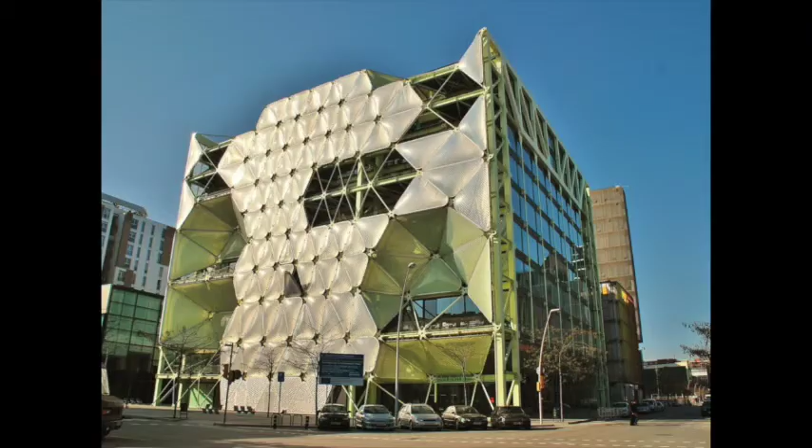And then more recently, and I think more profoundly as we move forward, are buildings that actually function more like organisms - biomimesis. They operate in an organic method to interface with the ecologies they're in. This is a building by Cloud9 in Barcelona, a fairly recent building. On its northern facade, as you can see on the right, one of the north-facing facades, it's open and clear with maximum glass.

On the other two southerly sides, it's largely protected by ETFE, which is a polymeric plastic pillow. You've seen this in the swimming cube, the Water Cube in Beijing in 2008.

These pillows are silk screened and filled with a gas, mostly nitrogen, which expands with heat sensors and fills it up, causing it to vaporize. It allows light to pass through but cuts glare, diffusing the glass because it has a kind of translucency.

Behind it, there are other areas where larger spaces are not filled with this kind of tile, and there's almost a reptilian, organic quality to how this matters. So you see three buildings over the course of 20-plus years, almost 30 years actually, that manifest themselves differently in interfacing with ecology.

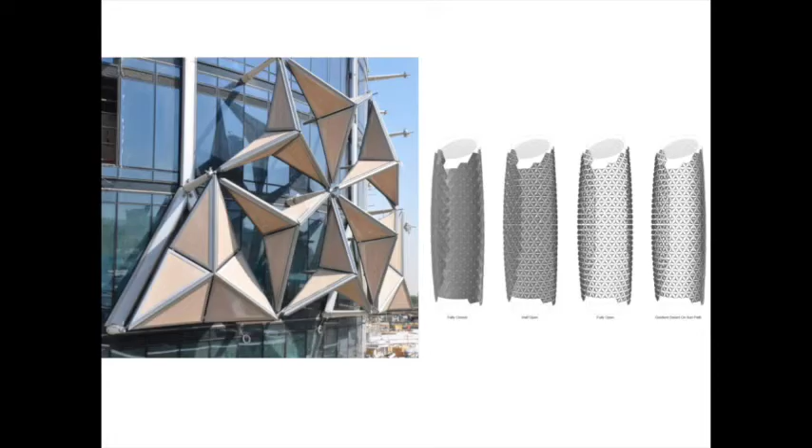Very recently, the Abu Dhabi Investment Council has done a building which you've probably seen—it's been much featured—but these are basically 2,000 triangular flower petals that are exoskeletal to the window.

The architects did not want to either coat the glass, that's to say tint it, or put a reflective coating on it. They wanted to maximize natural light when they could, so they made the choice of wrapping a shroud, optimizing the petals into 15 different petals, which then open and close in various degrees of aperture depending on the rotation of the sun.

So the building exterior moves, the interior building stays fixed, and when the sun isn't there, you get full view, literally full view. When the sun is there at a high point of exposure, it's quite opaque and closed. So again, it's a building that's interacting with the climate.

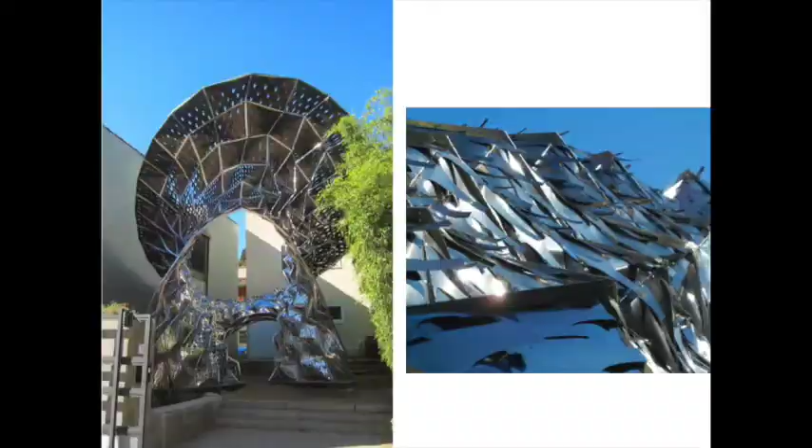In Los Angeles, there's a young group of architects—Doris Sung is one of them—who's experimenting with thermobimetals. These are metals which have existed in product design, but not really, to my knowledge, in architecture.

This is a very large mock-up, architectural in scale, but it still hasn't been applied. It's taking two metals with different thermal coefficients of expansion and putting them together so that when the sun hits it, the light is converted to heat. They bend or move at different levels, causing them to curl in ways that allow openings to occur to ventilate off of the interior surface, or actually to shade if they go into a closed position.

This is a very experimental thing. I think we'll know more about it as it's understood further, but you can see the kind of formal possibilities for some of this. This is a mock-up that Doris has made—it's about two years old.

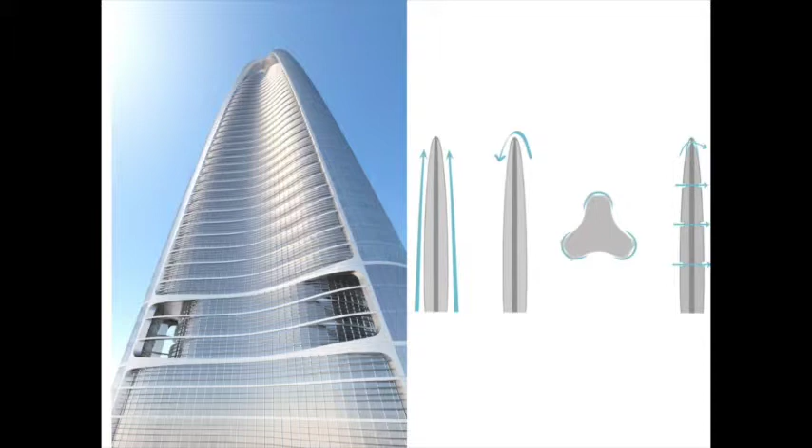There are a series of case studies in the book about aerodynamics and wind power. This is a building in Wuhan, a tall building by Adrian Smith and Gordon Gill, and they've done a number, as have other architects, that look at the aerodynamics.

The vectors on the right-hand side show you the acceleration zones of how frequently on a tall building the vortices will be vertical at the top. Anytime there's a bend, a corner, or a turn, a lot of things happen with wind, but by softening the corners, it actually accelerates the wind speed.

By creating apertures, it can accelerate—we all know the Venturi effect—accelerating and heightening the concentration of energy, then capturing it through turbines. There's a discussion in the book about these, but they obviously have implications on the kind of formal generation of the building type.

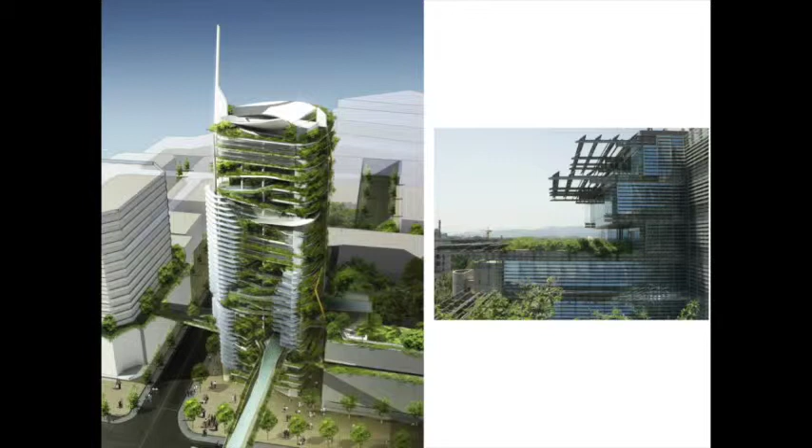Then, at the end of this chapter, we look a bit at biomorphic architecture. This happens to be Ken Yeang on the left, someone who has spent some 30-plus years mining this idea of tall buildings that actually would allow the groundscape to grow up through them. They're highly cavernous.

He's principally a Malaysian architect, and from his original house for himself 30 years ago, through a series of both proposal projects and a few actual projects, he's continued to mine this area of deep shade, cross-ventilation, indoor-outdoor spaces, and bringing the bioforms up through the building to oxygenate the shaft of the building.

On the right is Mario Cucinella at Tsinghua University in Beijing for a demonstration building there. We're looking at the southerly facade, seeing the horizontal shading racks, racks for photovoltaics, the idea of the sun, the oxygenation, and the plant material on that facade—how permeable that is. Similar buildings doing similar things in different ways.

Next. Performative skins. The prior chapter was somewhat about skins, but this goes into a little bit more detail about skins.

Probably most of us know this, but in my view, glass is really the preeminent material, the persistent material. We know the history of 19th century drawn glass from garden structures and pavilions and arcades and all of that.

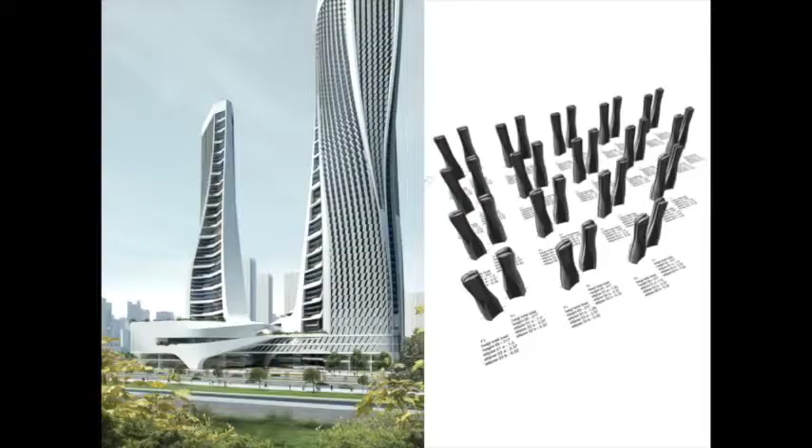This is a project by UNStudio, Hangzhou. It was Raffles City, the 7th project. The principles there, we're trying to do many things. It's a podium building, a shopping entertainment podium with 2 towers.

The towers are mixed use, with office in the lower portion, hotel and residence above, and multiple cores in the center. They bulge at the bottom and get smaller, but there's a desire to make them tortile. As soon as they become tortile, they activate the surface because their relationship to the sun changes in a very fluid way. You see some of the prototyping and mapping on the right.

The next image shows us some of the issues. This is an exaggerated view here on the left, but it shows that it's bigger, and as cores drop off it gets smaller. You see the plan sections up to the top.

Most importantly, in the east and west hemispheres, the shading is vertical. As it rotates into the southern hemisphere, it turns horizontal because the sun is high and running directly against the glass. So the efficiency, the performativity of the shading system, actually articulates a fluid rotation of these baffles, and you're seeing a little piece of it in the upper right. It's a way of taking the form, mapping the sun's impact, and then responding through a series of baffles.

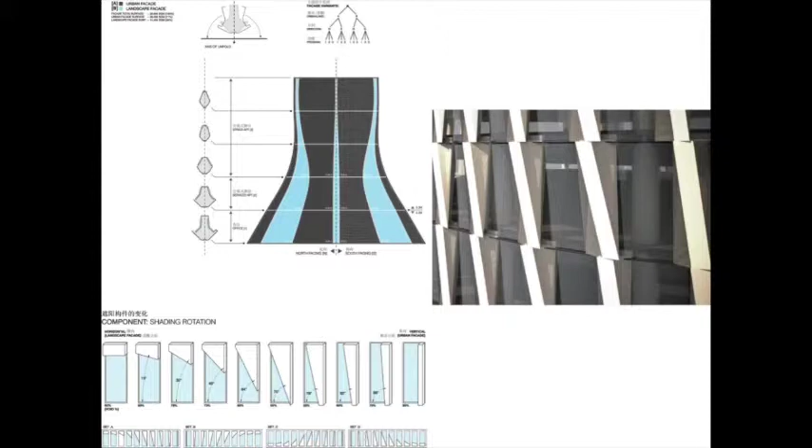Next, much talked about building, the Phare Tower in La Défense, Paris, by Morphosis and Thom Mayne. I think this project is very interesting for what it shows about idealization versus optimization. You all may remember when this came out in 2007, that long ago. It hasn't been built, but it's gone through a process of further design and constructability.

Where we are today, as I understand it from Thom, is closer to the end, which is to say all the skin members are flat now. They're all rectangular. They basically take their fluid form by changing the distance between the panels, so everything is absorbed in the panel joint rather than in the panel itself.

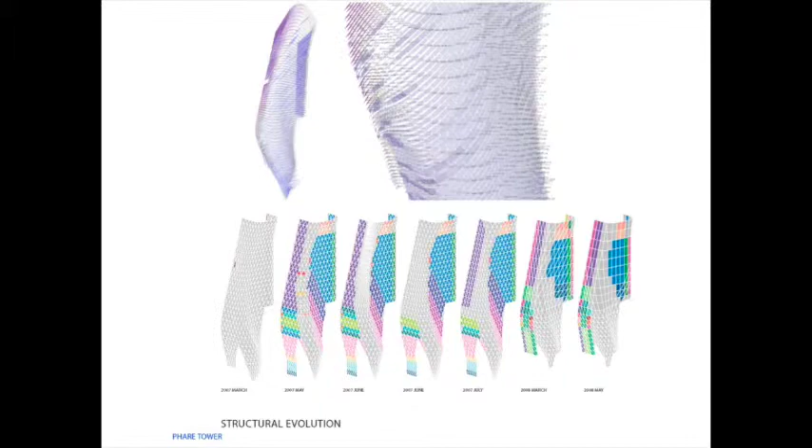Next, a building you all know, by Frank Gehry, 8 Spruce. In Frank's case, Ryan, we'll go ahead—you probably know his office. We went over to his office and I asked him if he would show us his model.

This is some of his models for this project. Frank always works three-dimensionally, more or less by hand. He builds things physically, and then historically he's mapped it. On this particular project, they worked through Rhino datum surfaces, then went into CATIA, and then into DP, digital projects, which they use now.

You can see some of the pieces were tortile—some of his earliest ideas were very tortile and shaped. At some point the development of the core and the units were developed. This is, as you know, a residential building, so there's metrics involved in that. And then you see the big models were really about surfaces onto cubic forms.

There's a whole range of things in here, but you've seen it, you know what it is now. It's really a T in plan, which fits the site, fits the adjoining streets, and then it's modeled in very specific elevations.

Like I mentioned with Tom and Morphosis's Phare Tower, again there's a rationalization process that tries to identify flat panels, panels with some complexity, and panels with more complexity. It grades them. There are floor-by-floor curtain wall units rather than long stick systems, so it can be put up in a unitized way. Then there's a metal system, an aluminum system, that goes over and expresses the curves on those elevations that have curves.

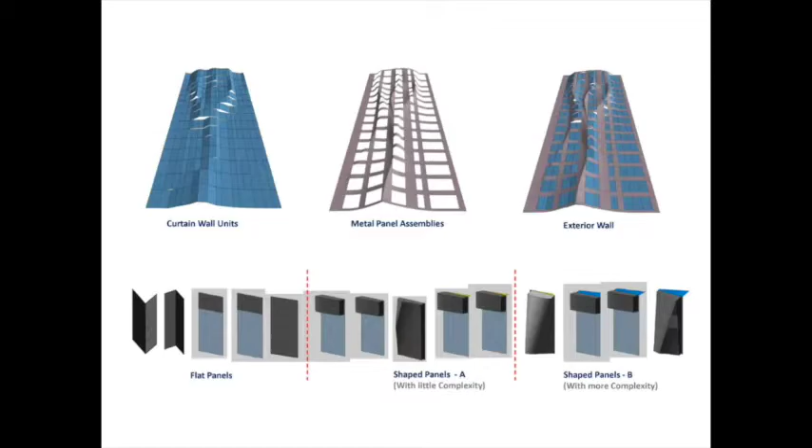Then there's an exterior wall, a series of sheets, stainless steel, that gets riveted to what's behind it. But all the windows are flat and straight, also flat in various orientations, yet very muscular, very rich. In Frank's case, I think it's a very accurate evolution of his physical modeling conception.

Next, next to last chapter: Performative Neighborhoods. This is a chapter I spoke about in the first book, actually, because it interests me a lot.

It's about mixed-use vertical buildings. There has been in the United States, maybe less so in New York, but in the West in general, a penchant for single-use buildings. The economics of that kind frequently prevail. But in Asia, it's not true, and in other parts of Europe it hasn't necessarily been true either. It's interesting going back to some of the first examples of mixed-use towers.

This is a famous example, Frank Lloyd Wright's Mile High Tower. It was part of the Broadacre City moment for him. He was 86 years old, and he said this would be a mile-high tower with 6 million square feet. I think the interesting thing is he said there'd be thousands of residences, office space, a hotel, concert halls and cultural venues. Yet when you look at the building, there's no expression of any of that—it's one sleek, unified single form, notwithstanding the narrative and program of what it is. I think this was the beginning of thinking in the West, in a very pure realm, about what it meant to be mixed use.

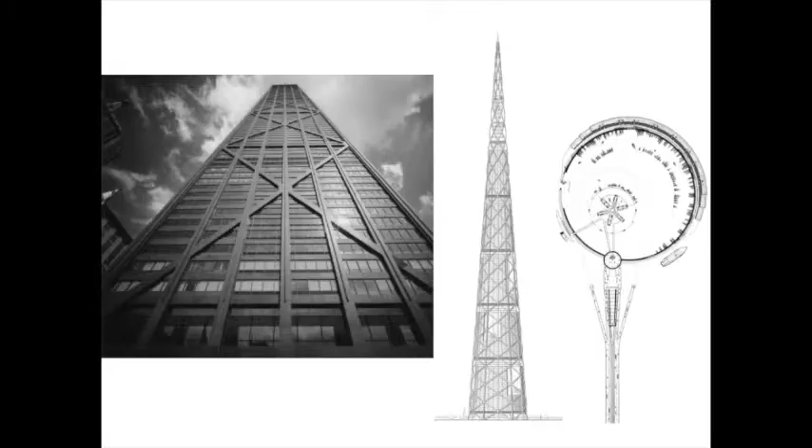The next one is the John Hancock Tower in Chicago, by Fazlur Khan and Bruce Graham at SOM's Chicago office. The building is 40 stories of office, then residences, then a restaurant, then an observation deck. It cants in slightly—it batters—because of the size of an office floor plate as conceived then versus the size of a floor plate for the residences. Other than that, that's the only giveaway, along with the floor-to-floor height, which slightly varies as you go up. But again, conceptually, the office was thinking of it as a single monolithic piece rather than expressing its differences. That seemed to be how we as architects, or our fathers or grandfathers, conceived of mixed-use buildings in the West.

On the right is Millennium Tower, Tokyo Bay, by Norman Foster. Again, it was a super tall building conceived as one piece, with a whole city in it, sitting out on the bay outside of Tokyo. What amuses me are the big cutouts you see, knowing the space was actually a donut with atriums inside. That obviously prefigured his Commerzbank, developed about 20 years ago, which you may know in Frankfurt, with triangular and octagonal openings and 5-story high atriums in the center. He was clearly in that zone when thinking about this. But still, it's one form rather than multiple forms—it doesn't really give the program expression.

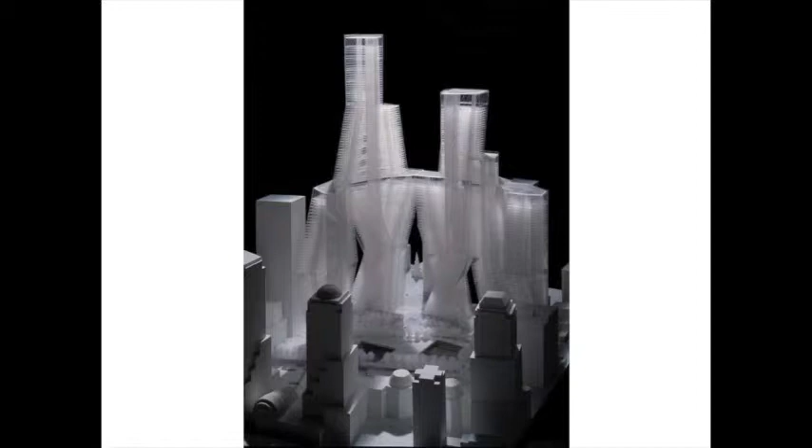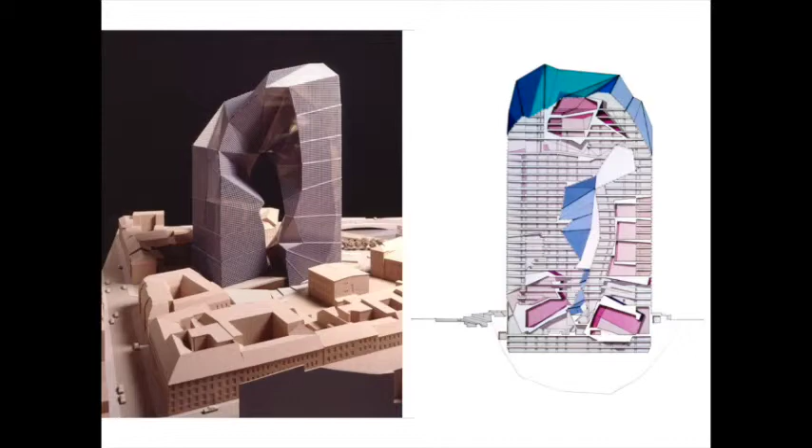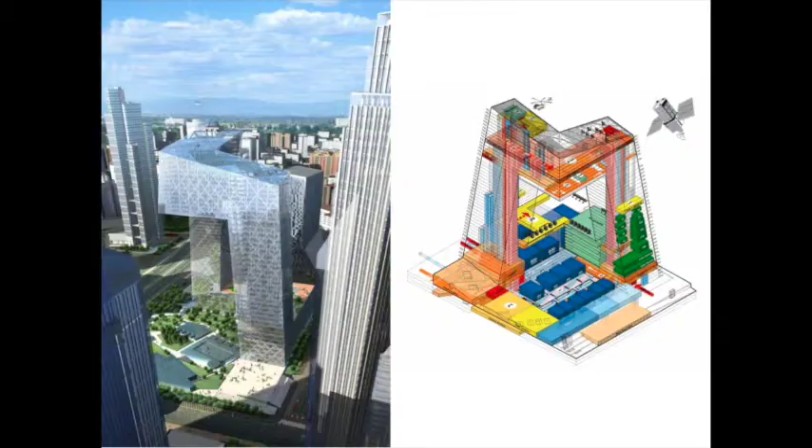One person I just want to point out who's always had an abiding interest in mixed-use form, and this isn't exactly a tall building. This is maybe a tall building on its side.

But all the early schemes, Steven Holl for Simmons Hall at MIT, which is a dormitory overlooking the Charles River, had all kinds of three-dimensional spaces and common student meeting spaces within it. It was pulled back, somewhat reduced, but the residue of that intellectual thought is still in the building, with large outdoor spaces, 3 cores that service vertically, horizontal connections that tie into the cores, and lounges and common spaces at various points through the building. So it was the beginning of an idea.

Steven has carried it further, into tall buildings. It's never gone away. Dramatically,

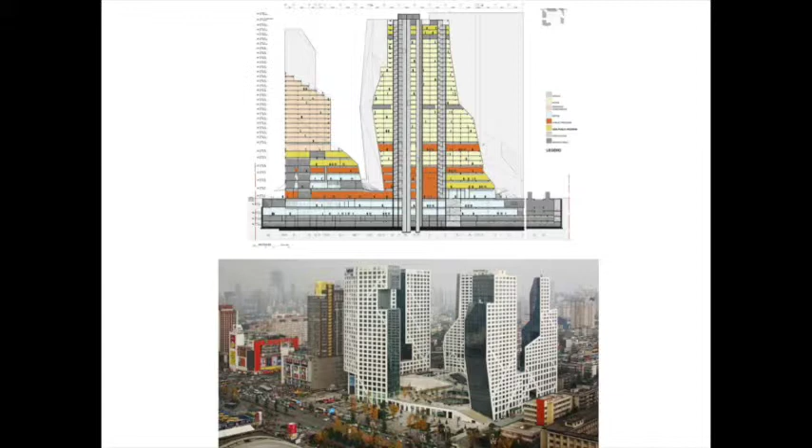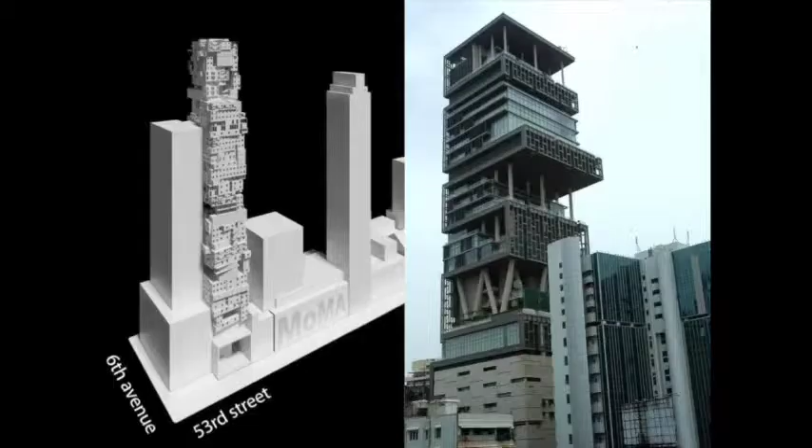And then, end the chapter on the idea of articulation and definition. Is it possible? It's kind of a conundrum. This was one of many projects done as commentary on MoMA's efforts to build a tower. And the idea, could you ever articulate functions? Is that possible? Is it desirable? Would it make it instantly obsolete? I think it raises as many questions as it answers.

On the right, the major telecom giant's tower in Mumbai. If you've been to Mumbai, you've seen this building, in the downtown core, at the bottom of the bay. As I understand it, it's still unoccupied, but it's a design of a tall building for a family of 6 people, and probably lots of service people as well. But the idea is the meaningfulness of articulating something, or the relevance of it over time.

Okay, the last chapter, and I'll end on this, is brief, because it has to be brief. Cities are complicated things with enormous histories, cultural histories, but just looking very topically at how buildings are made, it's tempting to see tall buildings as generic and non-city specific, because there's a group of professionals globally who make them. There is, to some degree, a global science and engineering knowledge base that we all use to work with.

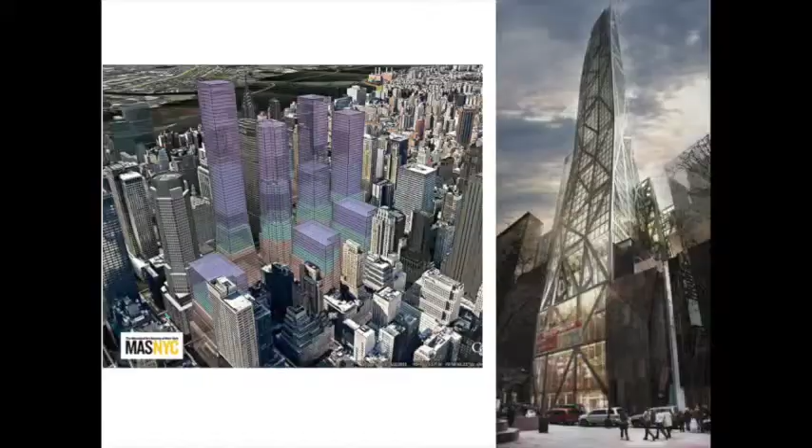I'm not here to tell New Yorkers about New York, but I follow it closely because it tends to prefigure what happens in other cities. It's obvious to people who study zoning that the major zoning changes in New York City—the 1916 light and air zoning, the 1961 and 1982 revisions—were all major watersheds in rewriting zoning codes. Within a few years after New York did it, many other major cities rewrote theirs along similar lines. I don't know that means everyone's following New York, but there's a conversation among professionals about the zeitgeist of the time and what matters in building out cities.

During Bloomberg, the city looked out to 2030. There's much to be said about this, pro and con, but densification was added. There was ability to generate higher densities based on a development district fee, a density bonus.

There was also, in my view as a designer, an infatuation emerging on supertall buildings. I don't know what to credit that to—we all might have our opinions. It might be that Asia and the ascendant developing countries were doing it and we weren't building the tallest buildings, but there's become a real interest in doing tall buildings.

Mayors such as Ken Livingstone in London and Bloomberg have talked about the need to develop Class A office space, so international service firms would have space to take multiple floors—that whole occupancy argument. It's been bold, big, with a lot of density. New York, to someone from Los Angeles and other cities, has quite a lot of public infrastructure in place. You have lousy traffic, but still much more infrastructure than many cities have, and there's been an infatuation at some level with that.